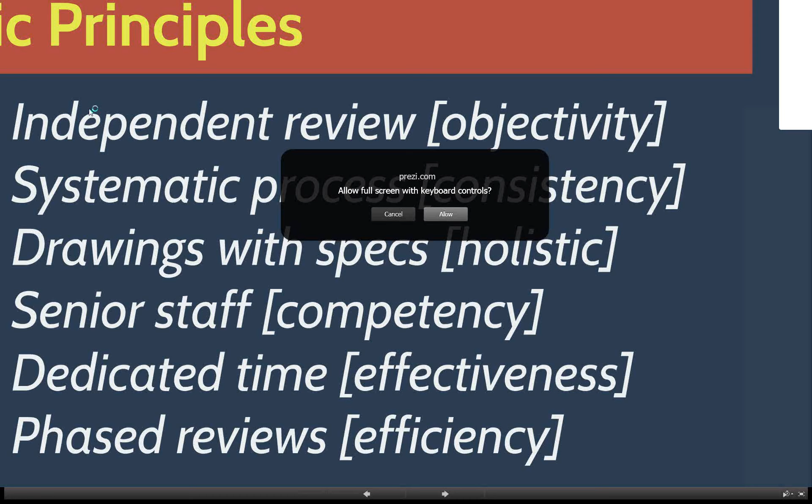So, Louis, one of the things we try to do when doing reviews for our clients is make sure whoever is doing the review isn't doing anything else. I think that goes to your dedicated time. Yes, because if you're constantly interrupted during a review, it's not just the extra length of time for the interruption, but every interruption sets you back, and it's probably taking twice as long as it needs to. Right, and that seriously makes inroads into the effectiveness.

And gosh, it's hard enough for project teams to even get enough time to do their own team reviews in an effective manner, so this is a real situation. I worked some years ago, back in the 70s, for a large AE firm in Cincinnati. They had a department called Design Review, and they had enough people that senior staff would rotate in and out, serving like a 3-month or 6-month tour of duty, and that's basically all they did, so they could look at the documents.

And we've talked about hiring another person or two who might be dedicated to doing these kinds of reviews, so that project teams know there is someone who can dedicate 40 hours, 50 hours to doing a really good, thorough review.

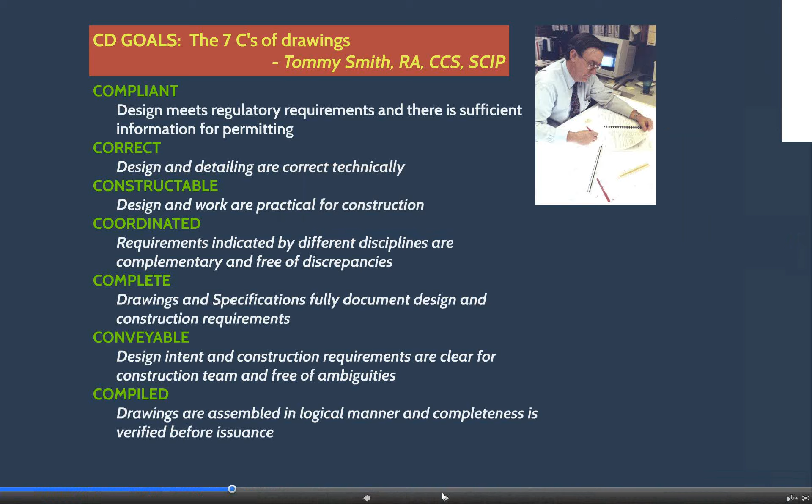All right. Where are we going next? Okay, Lewis? Yes, before we get going, a couple other things came in here.

Elias indicates that cost of RFIs come out of the AE's profit, but contractors use RFIs as a vehicle to create change orders. I don't know if you want to make a comment on that. Except to say that that's basically true. And then they are costly.

And then we had a comment from Kevin, one of our regular listeners, from a couple of slides ago, stating here regarding required development of design at various stages - example 30%, 60%, 90%, etc. It is vague in the industry. Our firm developed its own set of comprehensive standards for each phase of design for each design discipline. However, we still have the problem when dealing with sub-consultants.

Excellent. So what we have to do when we deal with outside consultants is communicate expectations. And that's what it's all about. Because there's no point in me marking this stuff up and people saying, well, that's not a DD issue, and getting all hot and bothered. So we want to have a level playing ground. Part of that is defining what the review goals are.

And of course, our biggest thing is to try to find things that cause problems, that cost money. One of the peer reviews I did, the owner actually called it a change order avoidance review. And so there are lots of things that we could mark up that we don't necessarily need to. I do flag spelling errors, but I don't look for them.

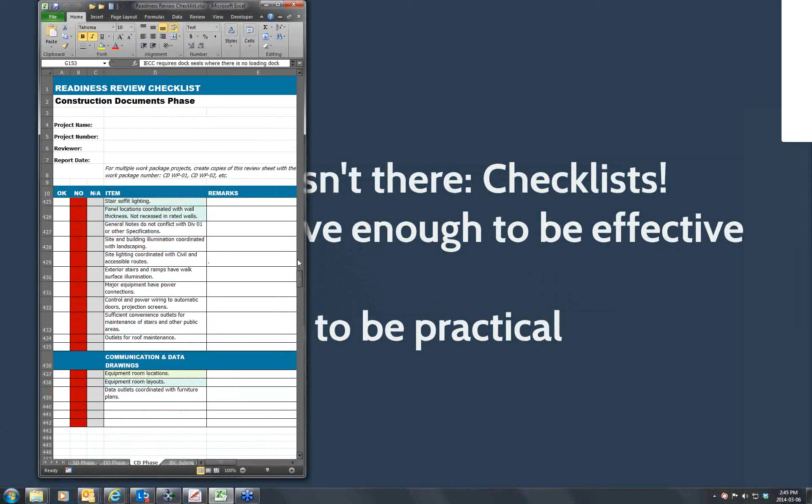The way I've done mine is I've broken it up—I start with an SD phase, and then it's cumulative, so into the DD phase I actually have the stuff from SD. So if I didn't get to look at the drawings in SD phase, I can make sure that I do that. And then the CD phase—because it's in Excel, the number of pages isn't really the measure—let's see how many I have, something like 430 items.

So I can check it off if it's okay, if it's not okay, or if it's not applicable. And of course, sometimes you have to add things for special kinds of projects, and you can just use NA for things that don't apply.

But again, you have to adapt this to what you're doing. If your primary market area is schools, your checklist is going to look slightly different from somebody who does corporate office buildings, and of course there's individual preference within your firm.

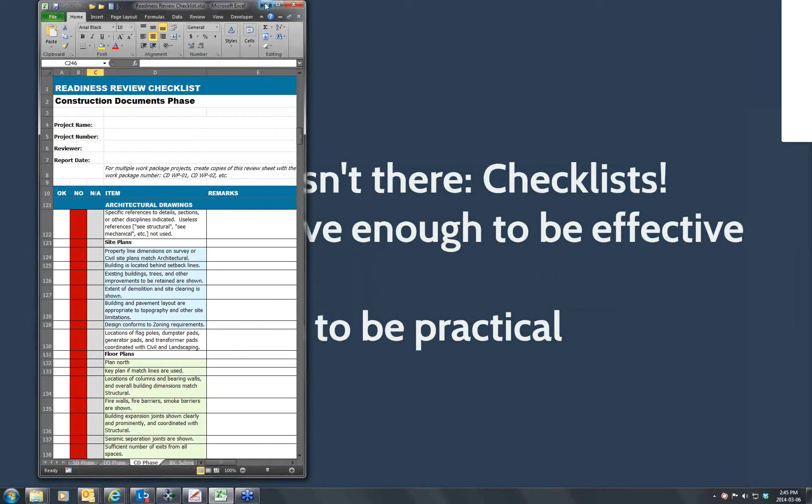I have a couple of friends here at the office who are allergic to checklists—they break out at even the thought of using them—but nobody is smart enough to remember everything between your ears. You just can't do it.

No, it's a handy way to just jog the memory. And we make the checklists available to teams so they can go through it themselves up front, and those things do happen, like with drinking fountains. I just checked a project the other day, and there were drinking fountains on the first floor but not on the second floor. Well, who'd have thunk? But we caught it so it can be dealt with.

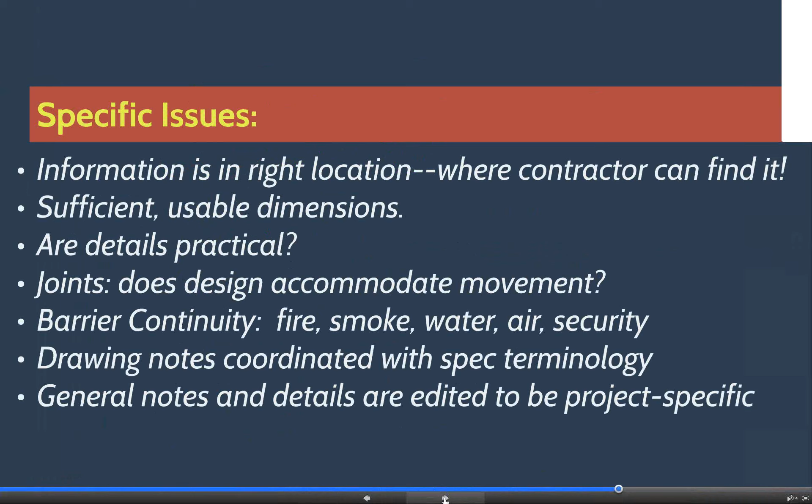One of the things you want to consider in doing the review is to try to do the review in the same order that the building's going to be built. Yeah, I think that's a good idea.

So, oh, you got my slides in there. I got your one slide in.

The worst one I ever had, David, I had 64 comments on one sheet.

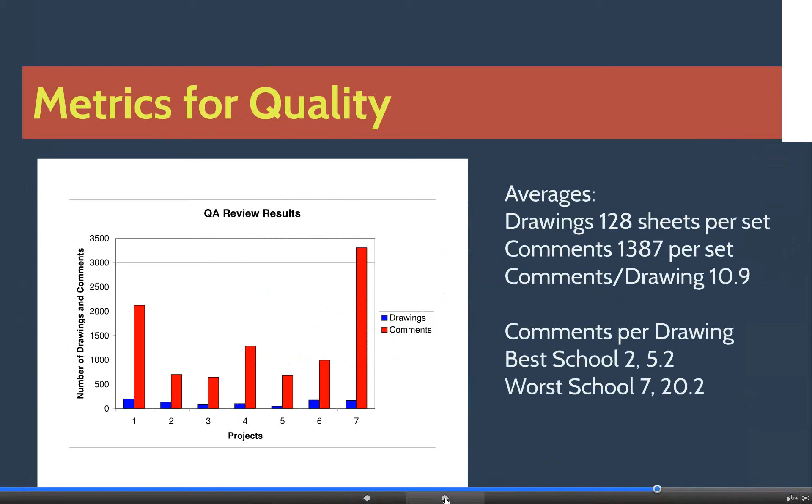Okay, well, this is a way that a firm can use to track whether they're improving or not.

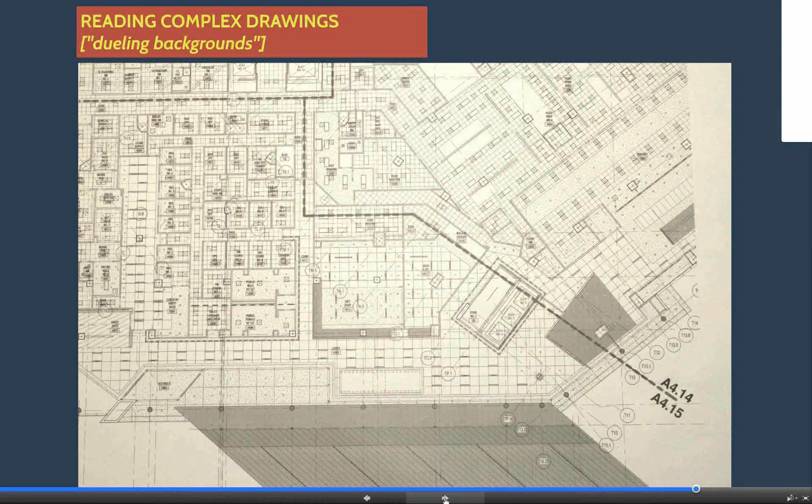This is just a little tip and trick. We all get presented with these very complex drawings, and it can be pretty hard to find what you need to see. So here's my little trick: I cut a hole out of half of a file folder, and by doing that you can focus in on this little area, and then just move this thing around when you're looking for stuff. It's pretty nifty.

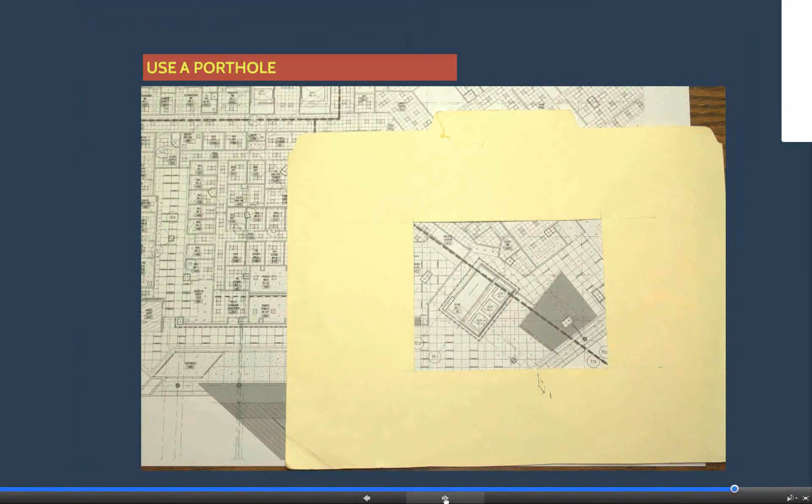Now, well, this says I should go over to Newforma, so let me do that. All right, and here we are.

Now, there are different softwares out there where you can mark up. I've used Adobe Acrobat Professional. There's, of course, Bluebeam and a couple of others. The great thing about Newforma is that it's integrated, so when I do a markup here in Nashville, it's immediately available to my Fort Lauderdale team. I don't even have to send it to them because it's stored in a location that all of the offices can access. And the other thing is that it's integrated with some other features.

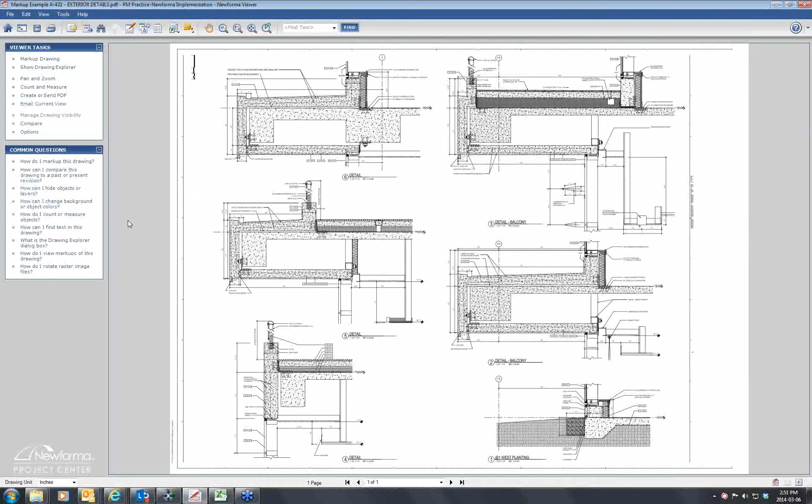Now, I've blanked off the name of the perpetrator of this drawing. It was not my own firm.

Hey, Louis. So let's take a look at, yes. Louis, this is Matt. Just because it seems to be kind of a resource hog while we're working on this, are there any more slides in the Prezi? If not, may I request that you close that to try to give yourself some additional software capability here? All right, I'll do that. That's the last one. How's that? Alrighty, that'll hopefully help a little bit.

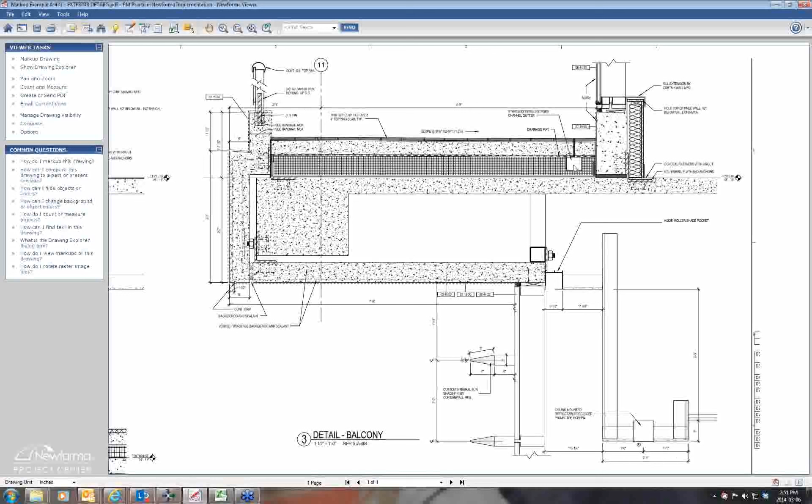Okay, so here's a detail, and now here's something interesting. We have clay tile, thin set, on a topping slab over insulation, and buried in that insulation is a channel gutter, and the only way for water to get into it is a quarter inch or less little slot. So I just don't think that's overly practical.

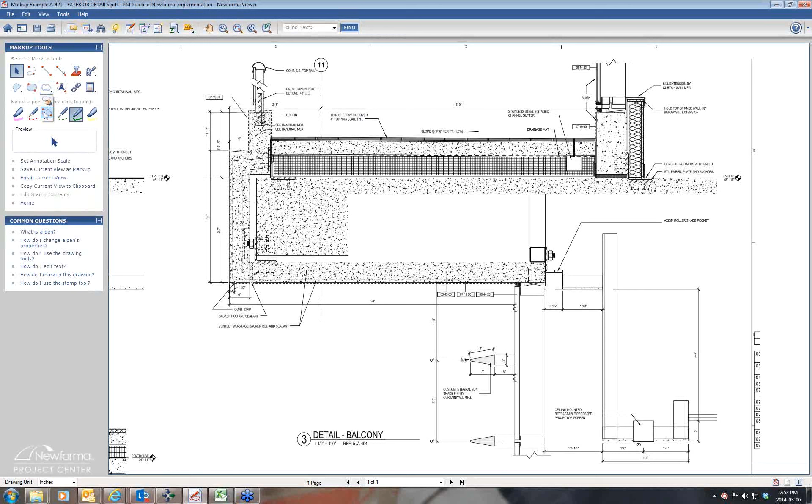Can't type. Not when people are looking. I'm not looking. Go ahead.

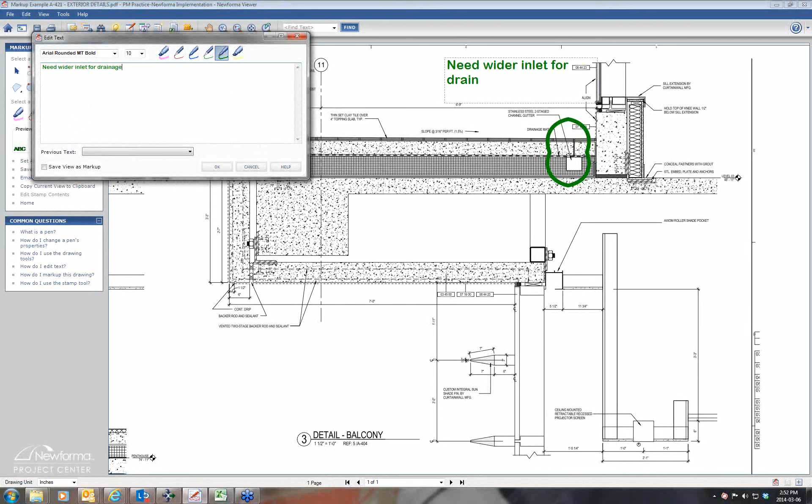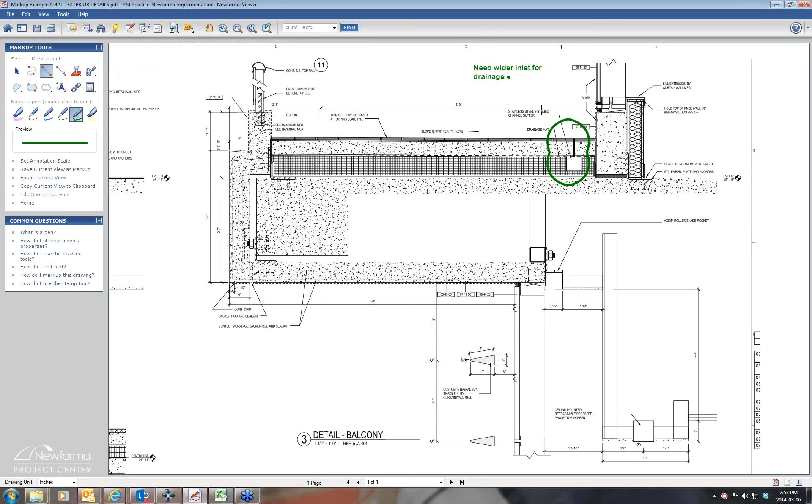And put that on there. And that's a little large, so I'm going to actually change the scale of the lettering, and we're going to make that a little bit smaller so that people don't think I'm shouting at them. And then to make sure that people know what I'm talking about, I'll draw a line here and connect it.

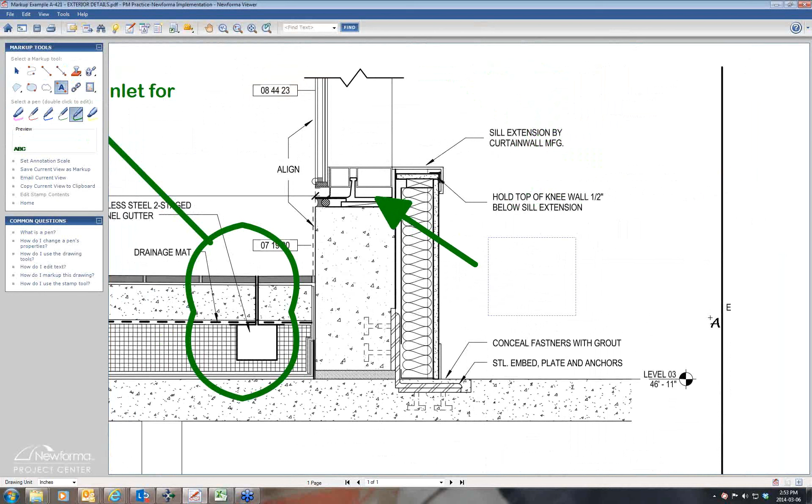Now I can, of course, enlarge and see things in great detail. And so all of a sudden I realize that they have anchored it to the wrong side of the wall.

So I'm going to draw a picture to that. I'm sure our audience is finding all kinds of interesting things in here that they would mark up, and there are other things. I can assure you I bled all over this particular one.

And of course we've got a thermal short. So to indicate a thermal short, I'm going to use a different color. I'm going to do that, and then again label it.

Come on, there we go. Oh.

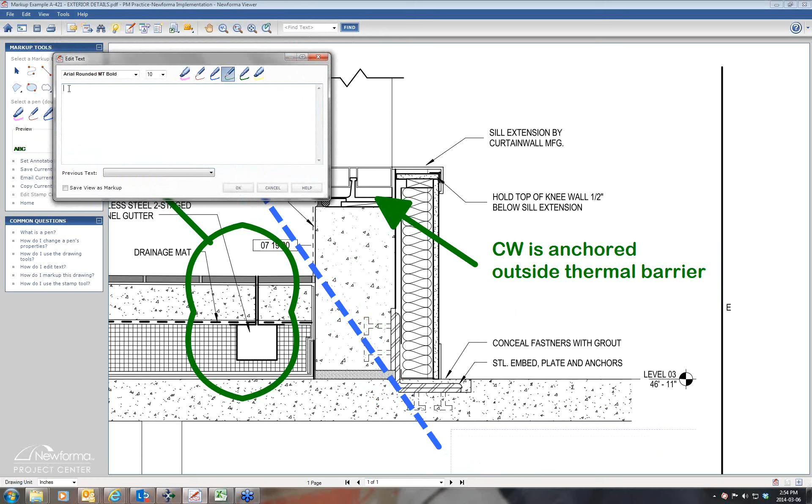So if we back out of this thing, you can begin to see how we can mark these up. These are PDFs. Now, this particular software, Newforma, has the capability that the markups are not actually on the PDF file itself. They're on a separate file. It's like a sheet of tracing paper that's an overlay. And so when you want to look at a markup session, it calls up both the base sheet and the overlay, and then you can export that if you need to, make it into a full PDF.

But you can also mark up drawings in almost all the CAD and BIM file methods. And the advantage of, if you have access to those, is that you can actually turn off some layers and control the visibility, so you can simplify things if you need to.

Now, one of the things... Yes? When you're doing your reviews, are you typically working electronically, or are you sometimes working on paper?

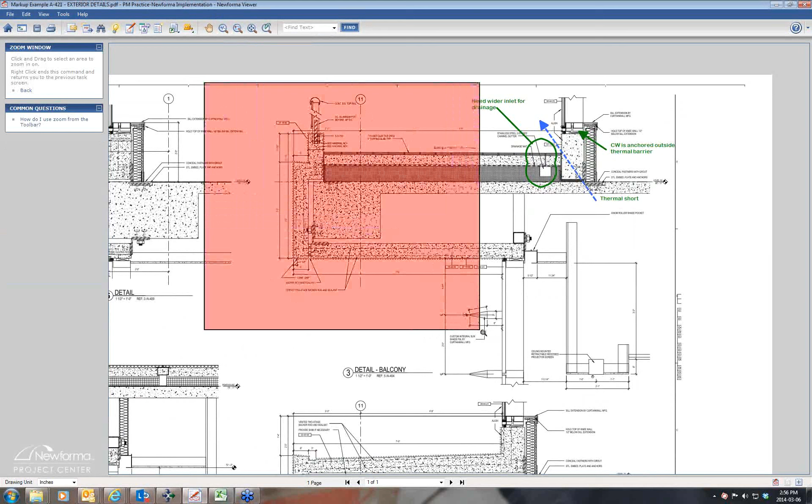Well, what I like to do is I have a half-size set of prints, because it's a lot easier to flip back and forth. If I'm looking at this detail and I want to take a quick look at the structural to see if you have these embed plates, rather than opening the structural sections, which I may not know which drawing they're on anyway, I can flip through the half-size set pretty quickly, and then if I need to mark the structural drawing, I'll just open it up.

But one of the nifty things you can do is actually scale things. Rather than holding my scale up to the drawing, I press this little button down at the bottom, and that turns on a snap. So now I go up here to this measuring tape.

And we're going to measure length, and to do that, you have to set the scale. So, okay, well, I know that from here, let me get that right, from there to there is 39 inches. So I plug that in.

Now I can measure the dimensions. So for example, I can find out, well, what is the thickness of this overlay slab? And it pops up over here. That's 5.5 inches.

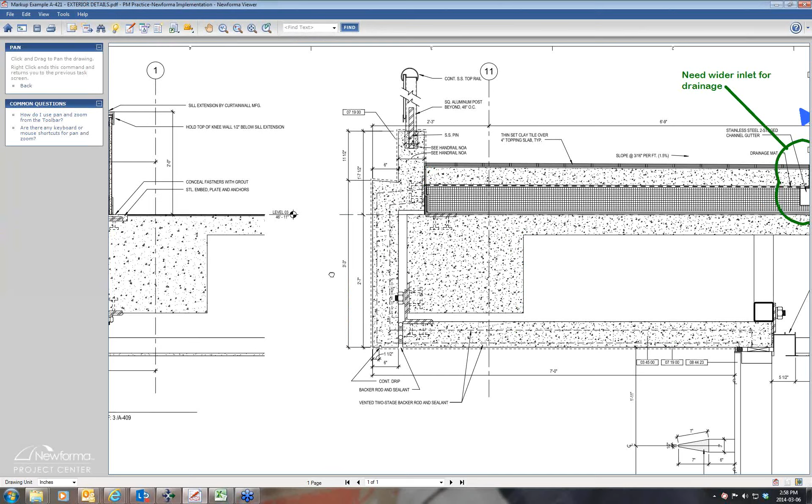And one of the handy things about this is that when you start marking up, you got a lot of comments. If you need to move one to make them more readable, you can do that without having to erase it and redraw it. You just pick it up and move it.

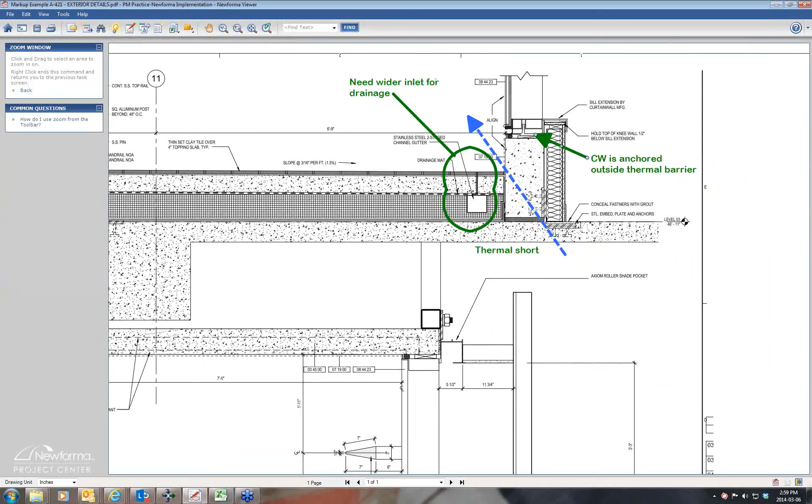Yes, but it's a little more cumbersome. What you can do is if you do a specific view like this, then you can export that as a separate view, and you can even assign it as a work task.

So as an action item, you can assign it to somebody, and the software will actually track it, and you can generate a report of all of the comments on a given sheet. It will have a small picture of this plus the comment. The problem is that gets kind of unwieldy, and it's okay if you only have a handful of things to detail or comment on, but for most I prefer to just mark the sheet as a whole. But it will do that.

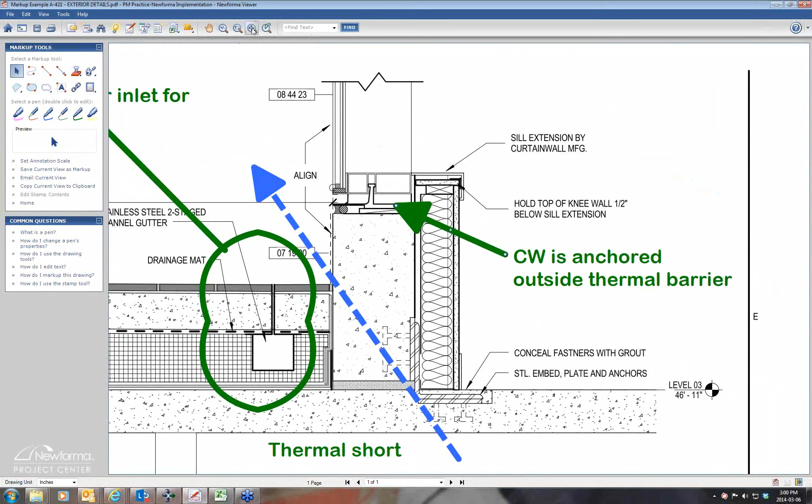Tying into that, just curious, because we do have a couple of our clients that actually insist upon a tabular form of all of the comments for their tracking purposes. Yes, it will export directly into Excel.

Okay Matt, so you have a couple of questions? Yeah, tying into what you guys were just talking about, Larry asked: how does the person who makes the corrections indicate the corrections have been made?

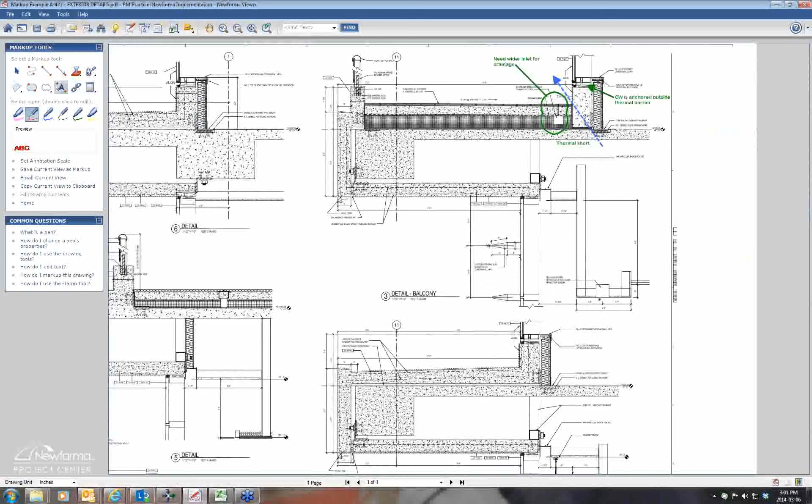Excellent question. There's a couple of things to consider. Some of our teams are pretty clever, and for example, I like to use green lettering rather than red lines. These are things that need to be considered by the team and thought through. What the project architect can do is, for example, let's take this comment: the project architect's comment is curtain wall not thermally broken.

That's the response. And then when the drafter accomplishes that... oops, wrong one, sorry. Lost my comment. Well, anyway, when the drafter finishes doing something,

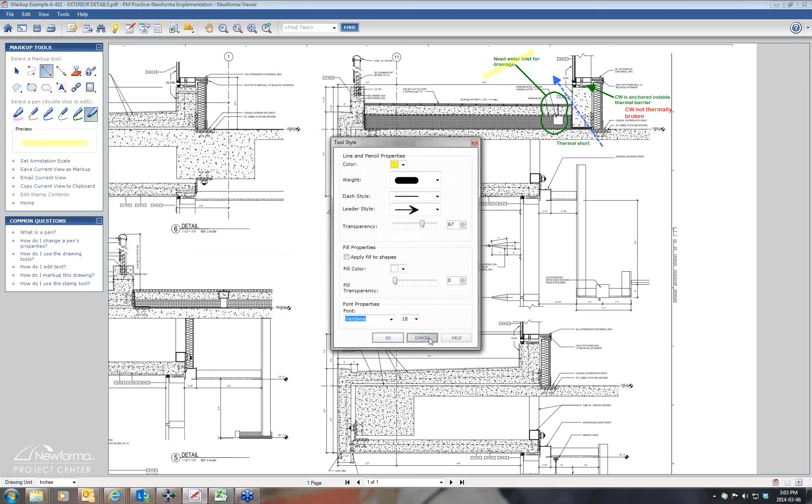they can use a yellow marker, and one of the things these pens will do is let you control the transparency. On this one I've got the yellow set for 67% transparency, so I can mark things off as they are done.

But you can see how I could mark something in green. One of my remote offices, Birmingham or Fort Lauderdale, the project architect can respond in red and mark and tell the drafter exactly what should be done, and then when the drafter does the work, they can mark it out with yellow, and you have a record.

So does that answer the question? Yeah. I see we're just a little past 3 o'clock, and we went a little late, but I hope that this subject, which we could easily spend 3 or 4 days going through in detail to train somebody, has given you some ideas you can use. Especially if you download the PDF, that'll give you ideas about improving your quality programs and give you points of discussion with others in your firm who are concerned about getting good stuff out there that won't have too many change orders and RFIs.